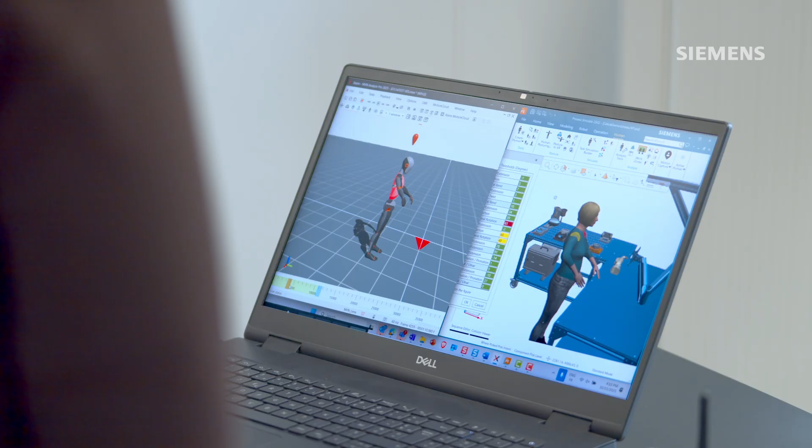In this video, we are going to review the key steps in order to conduct an ergonomics analysis with Process Simulate empowered by Xsens motion body tracking. We are going to review three main chapters: how to set up the motion capture materials, how to do an accurate recording, and how to analyze the data using Process Simulate. Let's start with the setup.

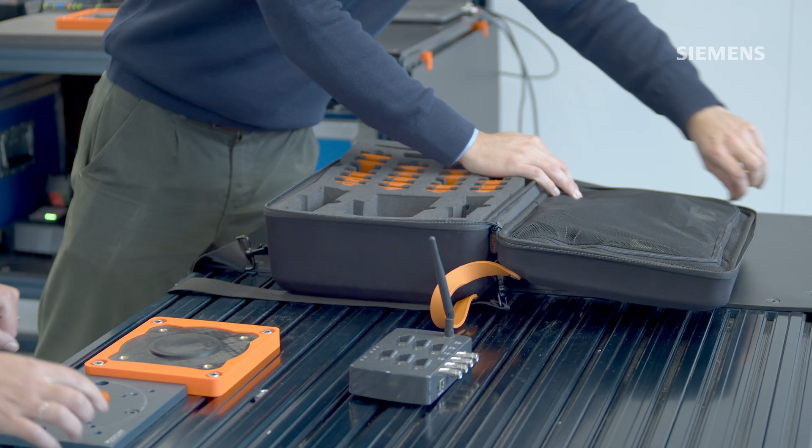First, the analyst comes with a laptop and the Xsens suitcase. Let us have a quick look at the necessary material. There are different key items such as the radio and the sensors, also called inertial measuring units. Other elements available in the suitcase are used to attach the sensors to the body, or to take measurements and prepare the configuration.

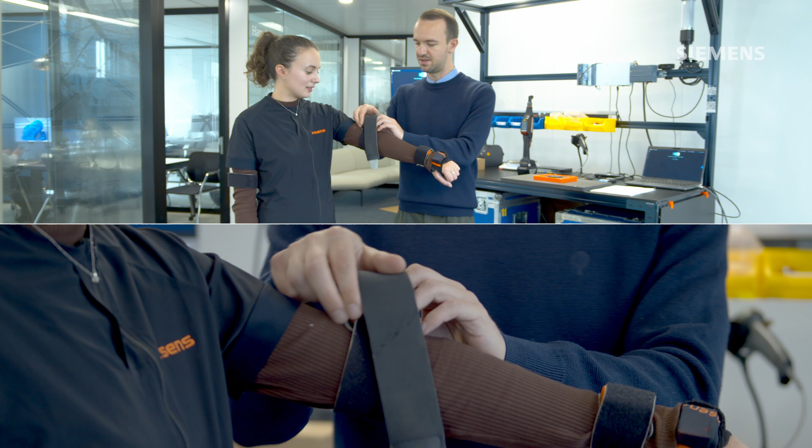At this stage, the analyst starts the MVN software and helps the operator put on the different sensors. Each measuring unit will be used to detect a specific body segment, from the arms to the trunk and the legs. It is important to respect the sensor placement in order to obtain precise body tracking data.

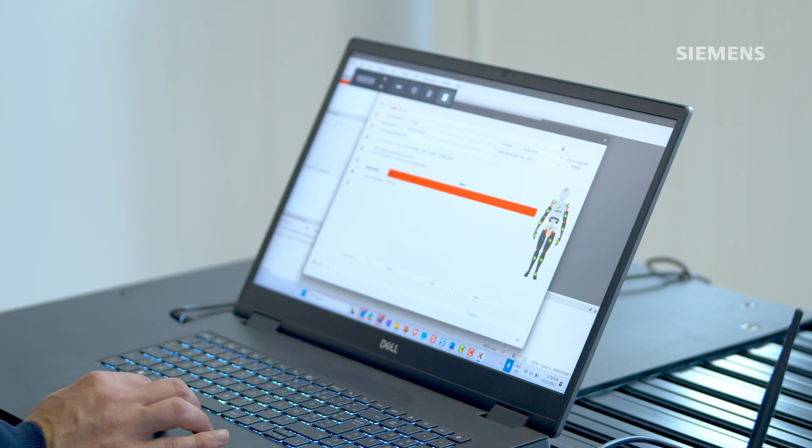Once all the sensors are positioned, the team sets up the motion capture using the configuration panel. The main metric to enter is the full body height, taking the heels into account. Advanced users could also access deeper configuration settings.

Next key step is to calibrate the system by following the dedicated process. The solution guides the operator through the sequence. The operator needs to first maintain the neutral pose, called the N-pose, for 3 seconds, before walking for 13 seconds.

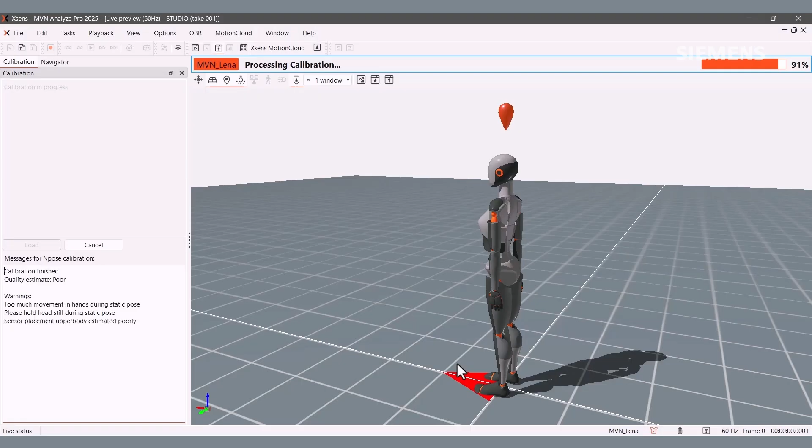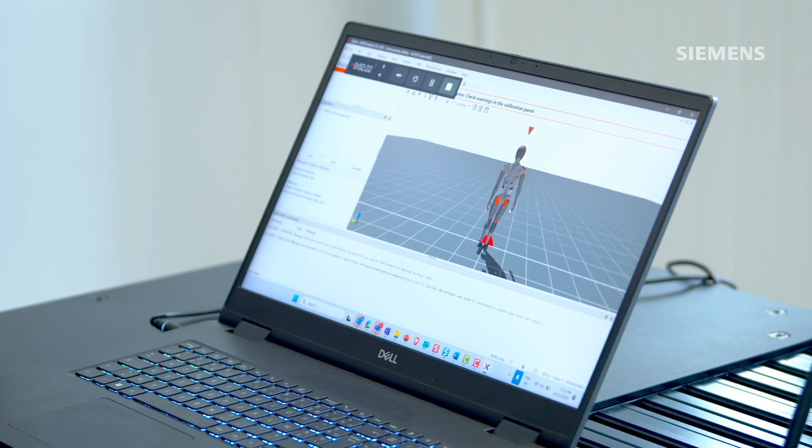The system computes the data for a short period of time before acknowledging a good calibration. If some sensor position should be adjusted, then the system invites us to restart the process and provides guidance on the way. We can now precisely follow the operator's body motion.

The Xsens mannequin follows exactly the operator's movement in a very reactive manner. Do not hesitate to test a couple of postures on the way.

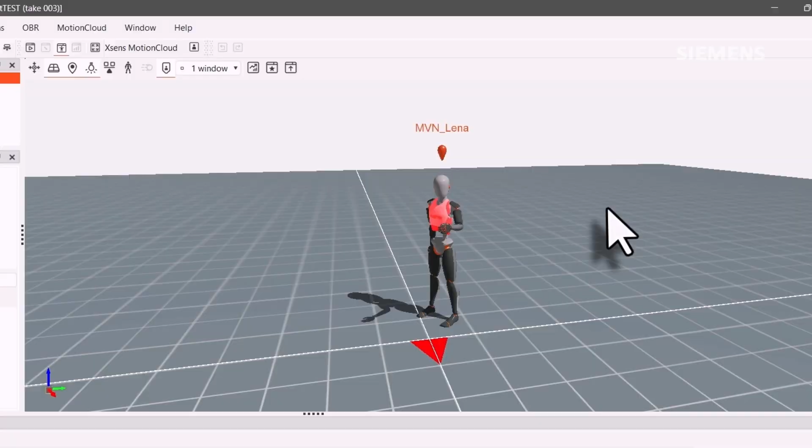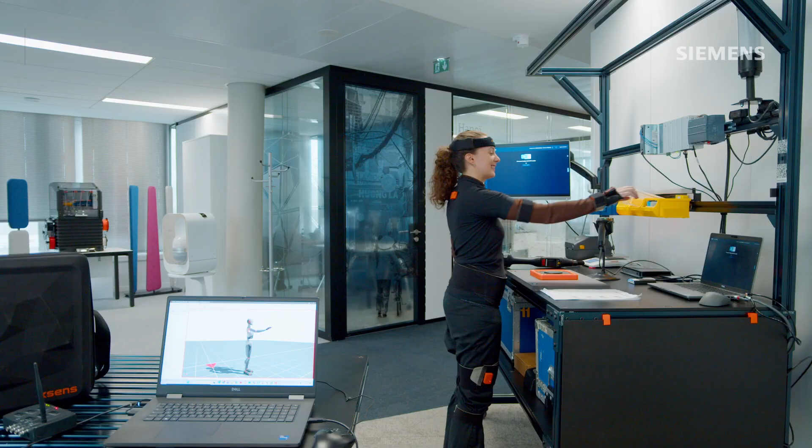We can now start the recording through MVN Analyze. It is necessary to mark an N-pose during the recording, ideally at the beginning of the recording. This posture will be used to synchronize the motion from Xsens to Process Simulate.

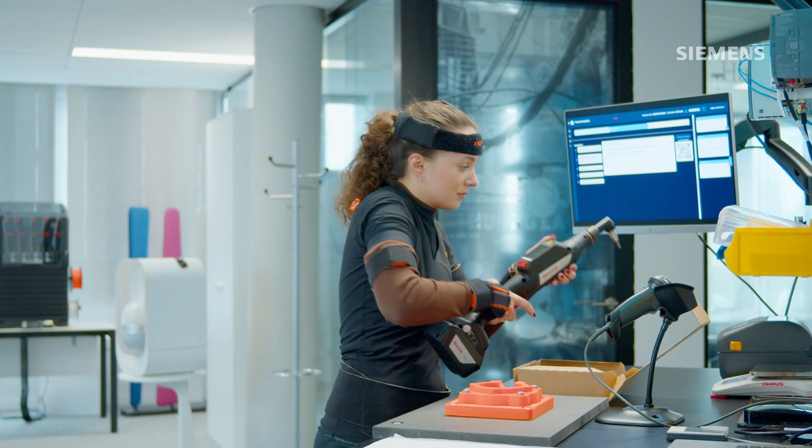The operator executes the different tasks that we would like to record and analyze. The idea is to capture the entire sequence and potentially repeat it different times to get multiple recordings of each key action. The recording can be saved as an MVN file and replayed on demand whenever you like.

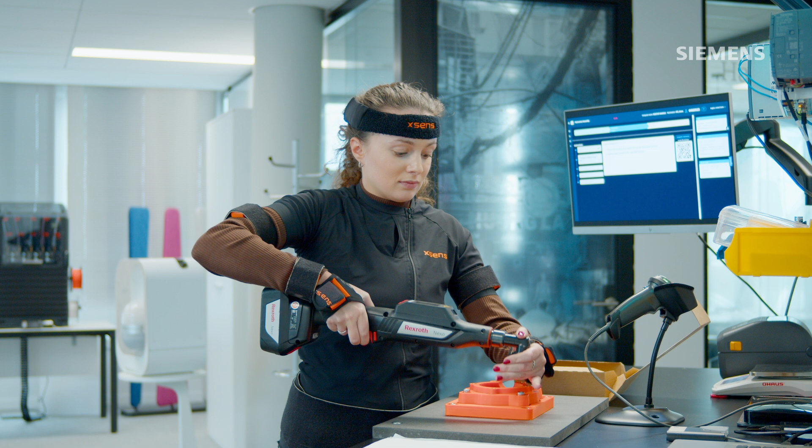The analyst could continue his job directly on the shop floor, closer to the operator, or comfortably installed at the office.

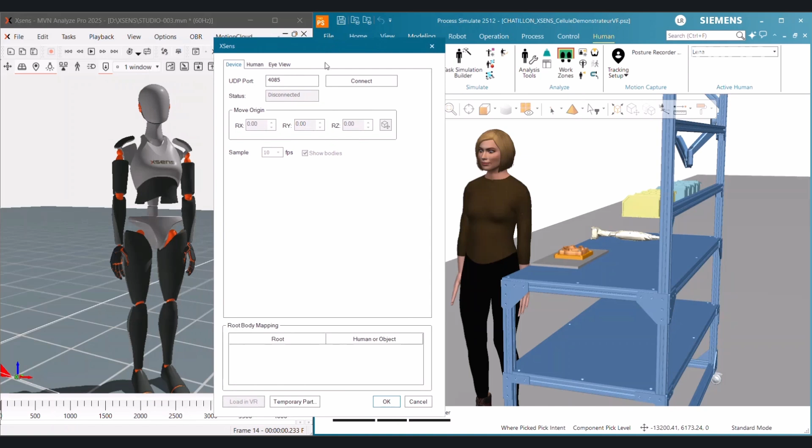At any moment, the analyst can stream the data from MVN to Process Simulate. The streamed data are used to map the mannequin's posture from both environments. Thus, the Process Simulate mannequin mimics the posture recorded on the shop floor.

At this stage, we can either capture static posture in the solution by creating different snapshots, or it is possible to use Posture Recorder and save the scenario inside Process Simulate.

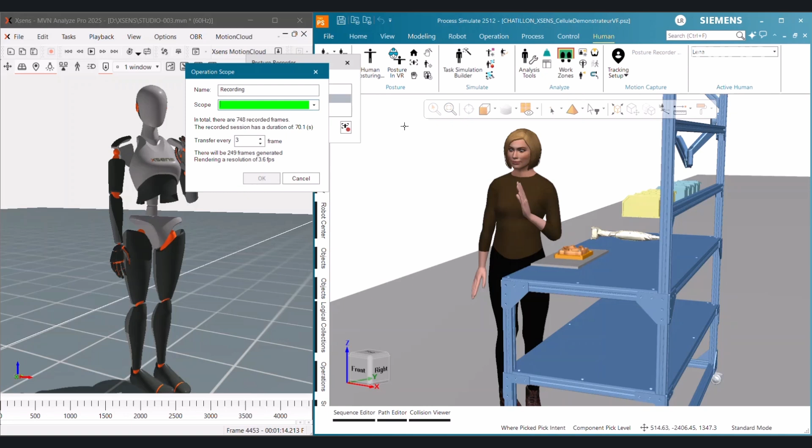The analyst has access to multiple ergonomics analysis methods, from RULA to REBA, in order to analyze the posture. He can also complete the analysis by adding some information about the efforts.

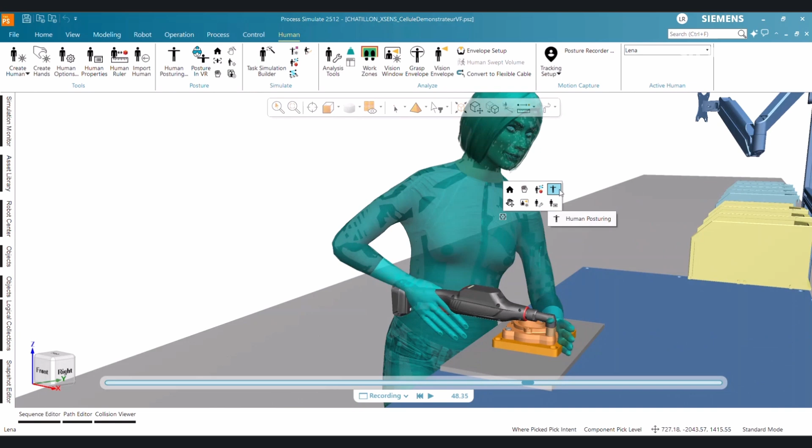For example, the weight of the part that is manipulated by the operator. Efforts are taken into account in the analysis and would influence the score obtained for a specific operation and posture.